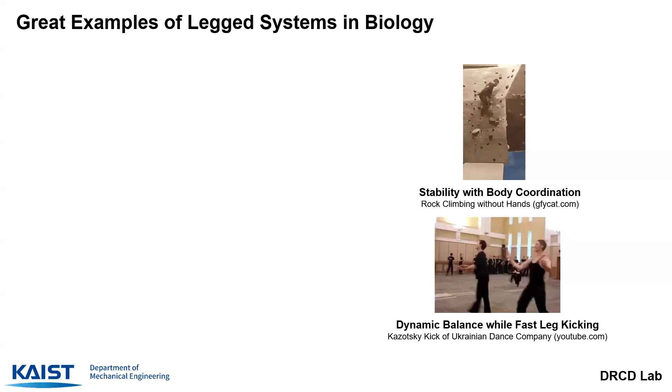A great example of a legged robot system is actually a biological animal. As you can see in this video, humans have extreme balance capability to climb walls, rock climbing, without utilizing their hands. This dynamic balance can also be achieved through fast leg kicking, as performed by a Ukrainian dance performer. This agile and dynamic capability provides great balance and agile performance in biological animal systems, including humans and some quadrupedal animals.

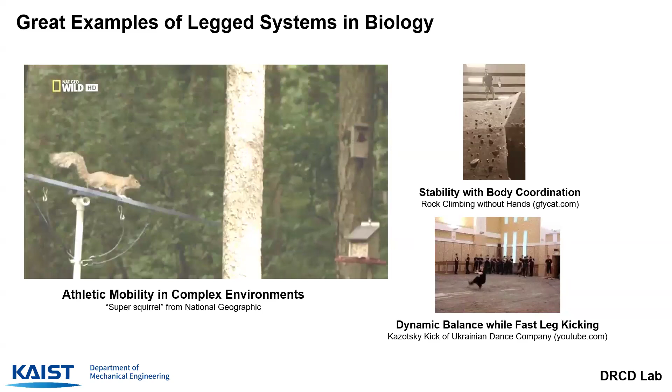But this video shows another level of athletic mobility - this is a squirrel. We assume this animal doesn't have very intelligent capability, but it can quickly jump over gaps and obstacles while utilizing its full body capability and physical limitations.

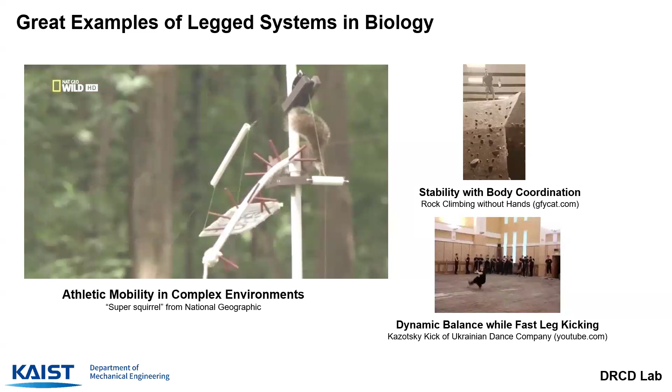It can climb a rope and utilize ladders, as you can see here. It can even ride on elevator mechanisms to navigate through very complex environments. Here we can see very intelligent behavior - it can combine many locomotion skills to navigate very complex terrain.

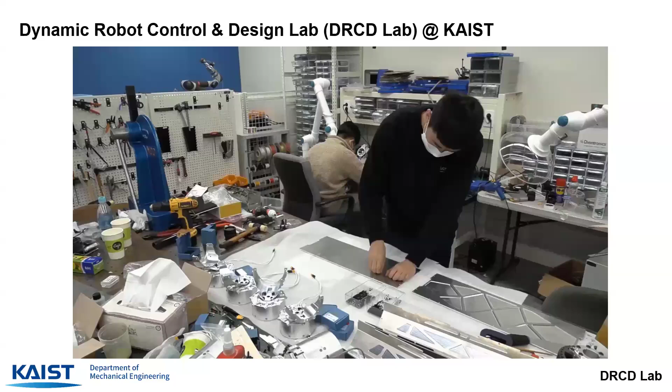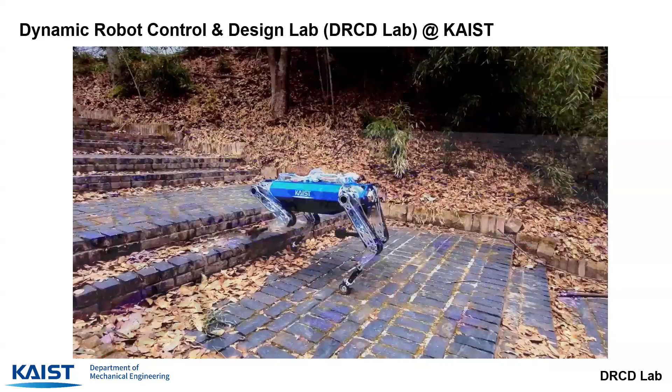In our lab, we are trying to reproduce this kind of capability in a legged robot system. Of course, we do hardware design and implementation - we manufacture our own hardware. And then we implement our control design in our robot. This video shows our robot Hound navigating and climbing up a hilly mountain near the KAIST campus.

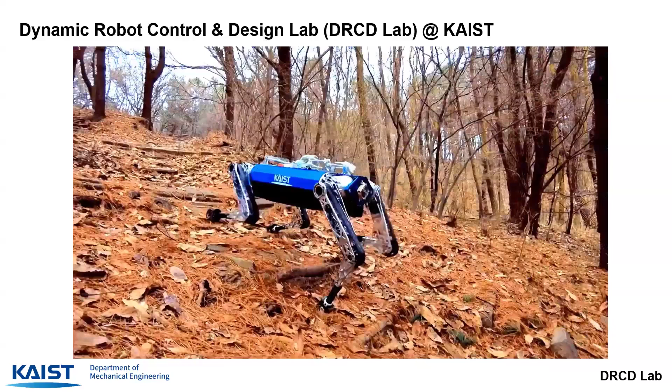In this talk, I will show two robots. The first is the KAIST Hound, designed for fast running. To achieve this, we designed our own custom motors and installed them in our robot. The second robot I'll show is the MARVEL robot, designed to climb vertical surfaces very quickly. This robot is equipped with a novel magnetic foot which can provide adhesion force.

To implement that, we utilize the electropermanent magnet. Unlike an electric magnet, this device does not need electric energy to keep the magnetic force on - we only need magnetic energy, and electric energy only when switching between on and off states. So you can save energy by utilizing this electropermanent magnet, and this switching can be done very fast.

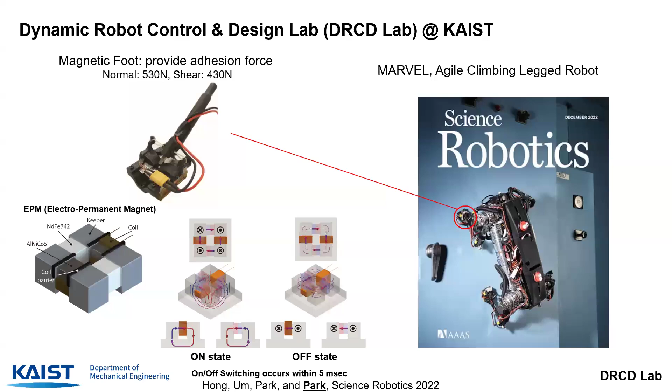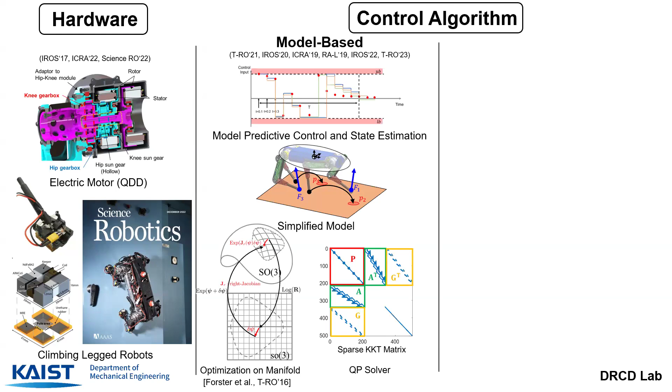For this novel hardware, we designed our own control algorithm, utilizing two frameworks. The first is a model-based control algorithm - specifically, we use model predictive control, and we study the model itself as well as the optimization algorithm. The second approach is a learning-based algorithm - we employ reinforcement learning, and we are now studying a hybrid type algorithm which combines trajectory optimization and reinforcement learning, which is an ongoing study.

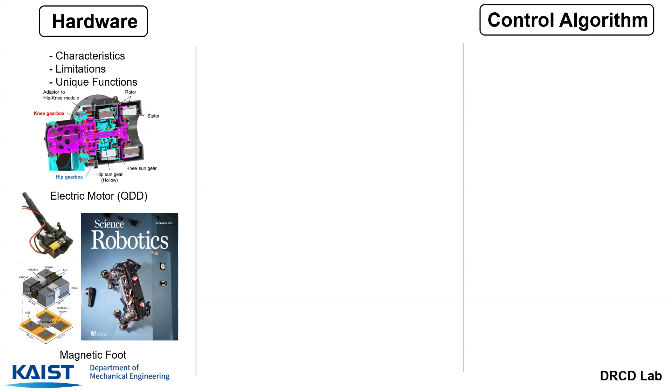So to design the control algorithm, we have to come up with a control algorithm which can respect hardware characteristics as well as limitations. Some hardware, like magnetic feet, has unique functions which did not exist in previous hardware. So we need to come up with a simulation algorithm in order to reflect this new hardware and its characteristics and limitations.

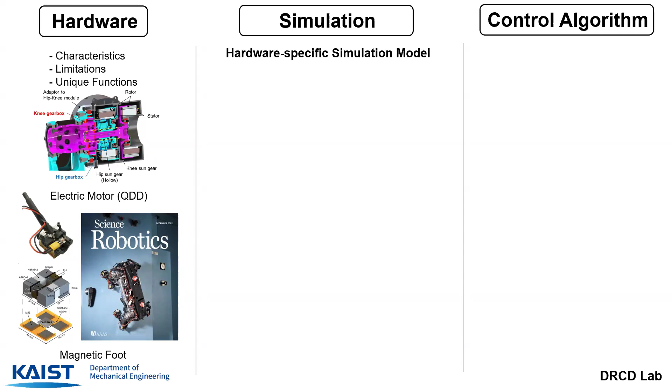In this way, we can actually fully utilize the hardware capability of existing systems. So sometimes we have a hardware-specific simulation model, and we add this kind of simulation model to existing software for dynamic simulation.

For example, actuator dynamics can be implemented. An actuator is not just a pure torque source, it has its own dynamics. So the electric motor has its own dynamics, and we add that in the simulation model.

As well as a novel hardware model - we mathematically model novel hardware and then add it in the simulator, to come up with this particular climbing simulation model.

The design control algorithm requires model-aware control design. So in the design of the control algorithm, we have to consider or respect this hardware-specific simulation model. For example, the reward function has to be carefully designed so that it can reflect hardware specifics as well as a constraint in your reinforcement learning algorithm or model-based control.

Model-based control design. So today I will talk about how to implement this, or how to come up with and design the hardware-specific simulation model and model-aware control design.

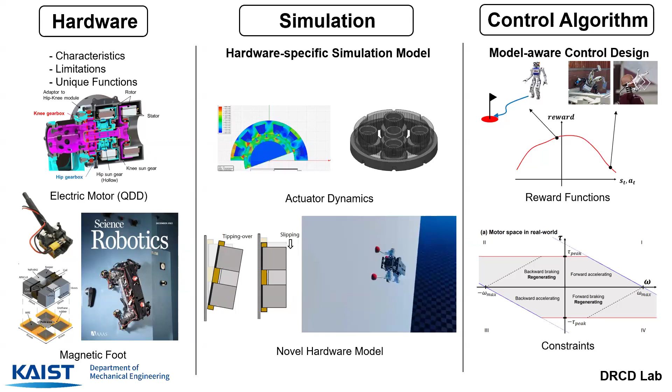As an experimental roboticist, we encounter a lot of moments of catastrophic failure, and we can learn something from this experience.

For example, this is my Mabel robot from my PhD. We broke Mabel's foot, Mabel's ankle. But don't worry, it takes only about 30 minutes to fix this leg.

And then for the MIT Cheetah 2 robot, for my postdoc, there was some amplifier explosion, and then some weird behavior that was not designed by me.

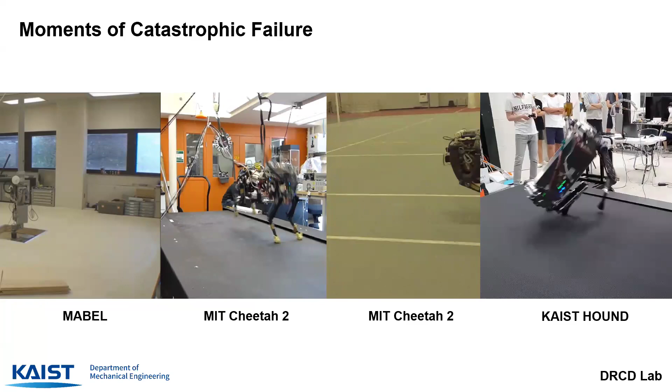And then this KAIST robot fell because of bad control. So these failures provide us some lessons, but especially these two failures actually motivated us to design new control algorithms. We will get back to these two failures later, okay?

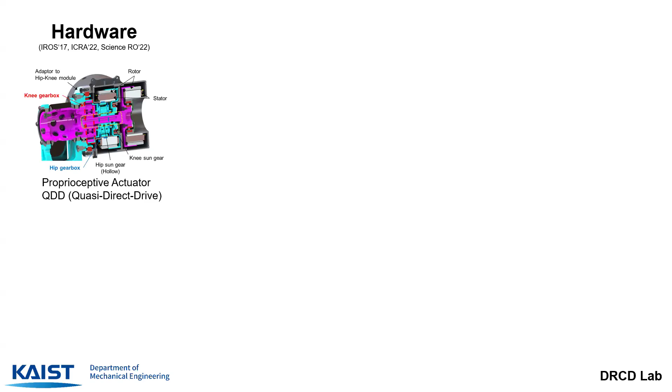So first of all, let's talk about the hardware design. We are utilizing quasi-direct drive, or so-called proprioceptive actuator, which was originally proposed by Professor Sangbae's group at MIT. And we kind of agree that this QDD actuator was actually an enabler, a technological enabler, for the success of quadruped robots as well as some humanoid robots.

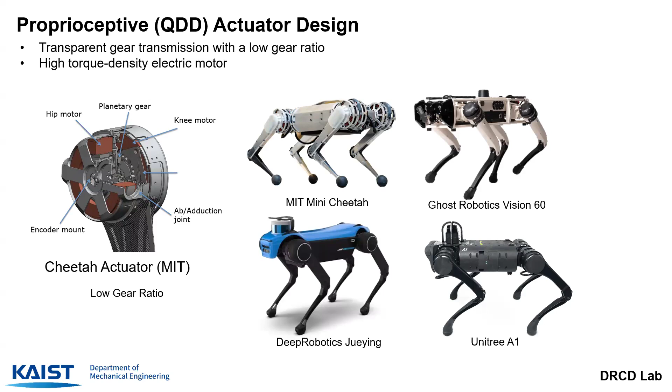The idea is actually very simple. We utilize a high torque motor as well as a low gear ratio gear reduction mechanism in order to improve the transmission, the torque transference, and improve the backdrivability.

So here I'm showing you the proprioceptive actuator design with the low gear reduction ratio. But how much gear reduction ratio do we have to utilize? In order to answer this question, we utilize a trajectory optimization algorithm.

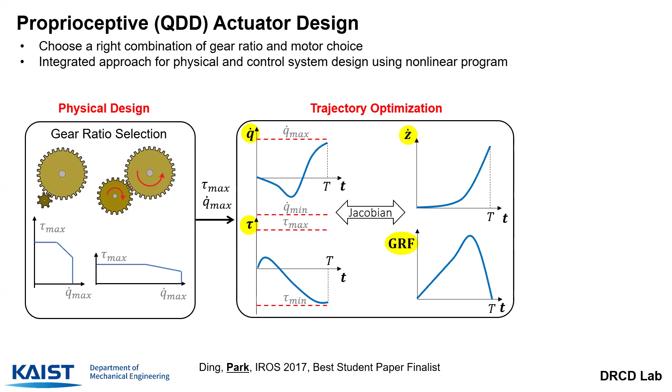In the previous method, the design procedure is actually very iterative and sequential. So here we select a gear ratio, and the selected gear ratio determines the operating region of the motor with respect to torque and omega, angular velocity. With this motor operating region, you solve a constrained trajectory optimization algorithm and obtain the trajectory. Then we check that this obtained trajectory satisfies your desired performance, and if it doesn't, we go back and iteratively select a new gear ratio and do this again.

So in our work, we combine all of this process into one nonlinear optimization problem. Here we try to maximize jumping height while reducing the impact force upon landing, while respecting limitations on actuator torque and speed.

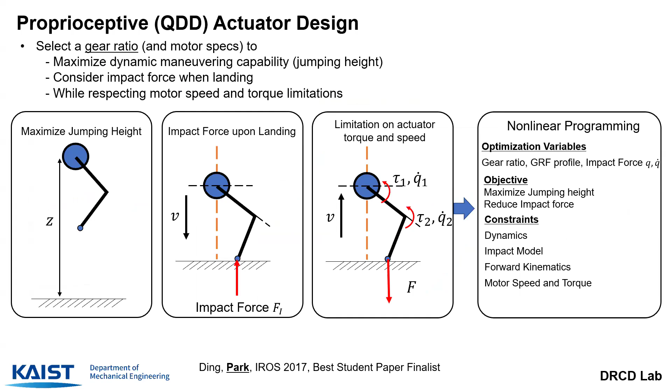And then to realize this gear ratio, we have to design a compound planetary gear mechanism. This is the performance of the jumping height of the leg installed with the actuator we designed, and this leg is actually implemented in the MARVEL design.

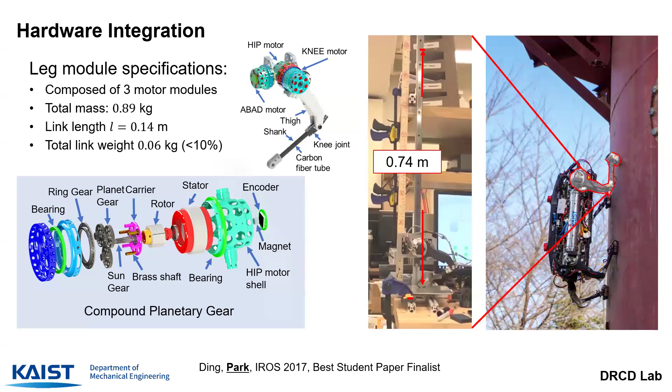Next design optimization we did is actually, now we try to include the number of gear teeth in our optimization problem. The number of gear teeth is an integer variable, so now the problem becomes a nonlinear mixed integer nonlinear programming problem. You have the number of gear teeth of the ring gear, sun gear, and planet gear. This combination will provide the gear ratio, and then this gear ratio will affect many things like motor selection, swing rate, trajectory, energy cost, something like that.

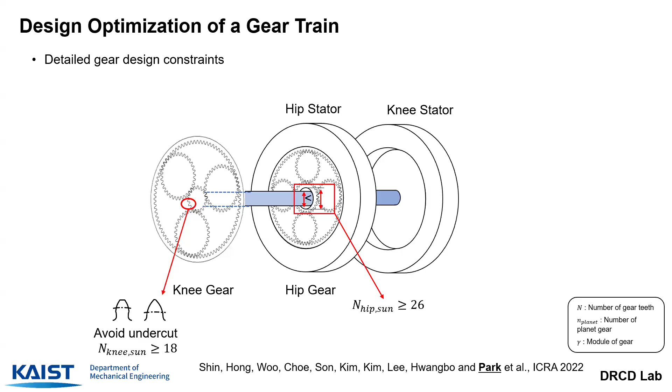The benefit of having this number of gear teeth in your optimization algorithm is that you can consider the hardware-specific design or detailed design. For example, number of gear teeth of the knee gear should be larger than or equal to some value to avoid the undercut. And number of gear teeth of the hip sun gear should be larger than or equal to this number in order to make the shaft go through the hole which is in the hip gear, for example. This kind of specific design consideration can be included in the optimization problem if you consider number of gear teeth.

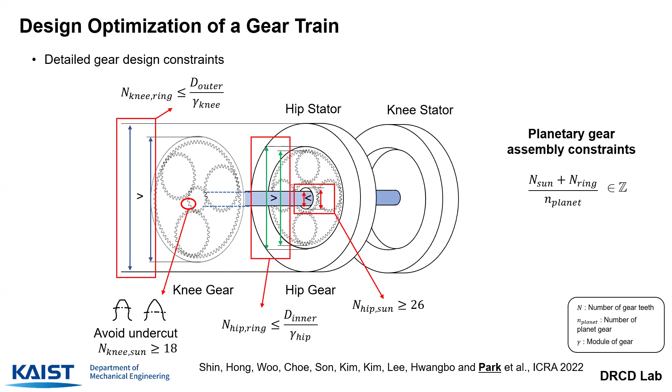And then finally, planetary gear assembly constraint, so that you can assemble the gears with that number of gear teeth to make the planetary gear set. If you solve this optimization algorithm, you can obtain the gear ratio as well as the number of gear teeth, and this number of gear teeth can be directly used to design the planetary gear set. So we designed our planetary gear set and motor module, and installed that in the KAIST Hound robot. So this is how we design the quasi-direct drive actuator to select the gear ratio, utilizing a planetary gear set.

Since I don't have much time, I will just directly go to the control design.

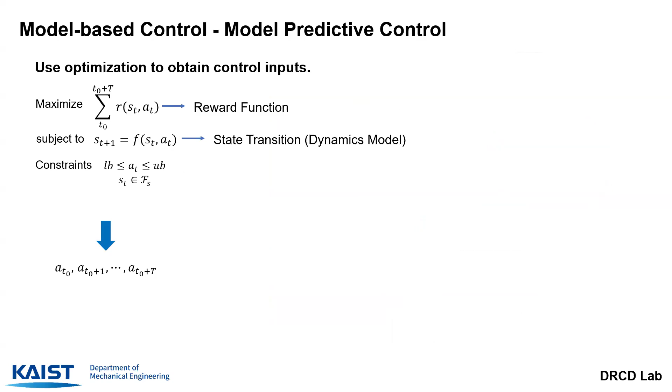The first control method is a model-based control design, specifically model predictive control. In model predictive control, we try to solve a small optimization problem that has a reward function and a state transition model. If you solve this finite time optimization problem, you can obtain the set of sequences of actions, and then you implement only the first input, first action, at t equals 0. After that, at the next sample time, you solve this optimization problem again, obtain the sequence of actions, and only apply the first control action, and so on. Then you can obtain feedback.

This optimization problem should be solved within around 10 milliseconds in order to make it real time.

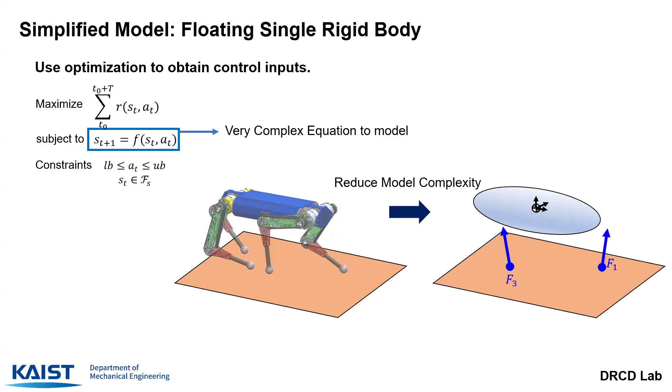But the problem is the transition model is actually very complex, because the robot consists of multiple rigid bodies - it's a high degree of freedom model. So what we do is reduce model complexity. We took out the contact dynamics model, and assume that the robot is just one rigid body, which is controlled by ground reaction force. With that, we can roll over the contact dynamics.

Because we don't have contact dynamics, the contact sequence should be predefined - it cannot come from the optimization algorithm, because the optimization algorithm doesn't have contact dynamics. So we normally predefine the sequence of foot contacts, for example trotting gait, bounding gait, and galloping gait. And then we design the MPC algorithm.

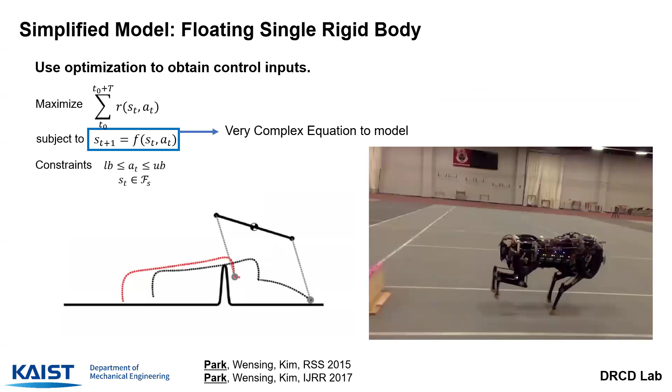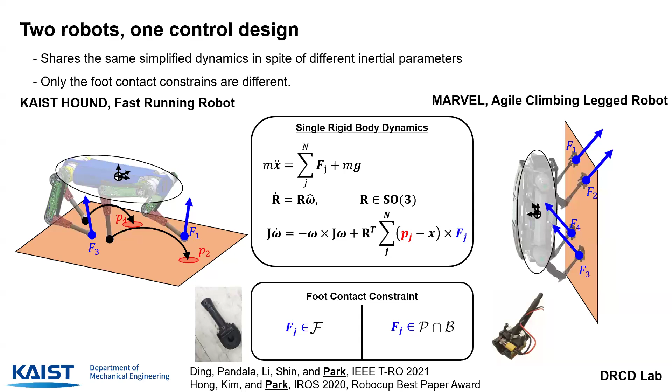If you look at the robot as single rigid body dynamics, then KAIST Hound and the MARVEL robot actually have the exact same mathematical model, but different inertial parameters and different foot contact constraints. The Hound robot has to satisfy Coulomb friction constraint, while the MARVEL robot has to satisfy foot contact constraint imposed by magnetic foot. So it's a little bit different, but they share the same dynamics and can use the same optimization algorithm.

In single rigid body dynamics, if you are working on 3D single rigid body dynamics, you have this manifold variable R, which lives on the SO3 manifold. A normal MPC algorithm converts that into Euler angles, but Euler angles have some mathematical issues - they do not provide a consistent distance between two orientations, and they suffer from the gimbal lock problem, which means they suffer from singularity.

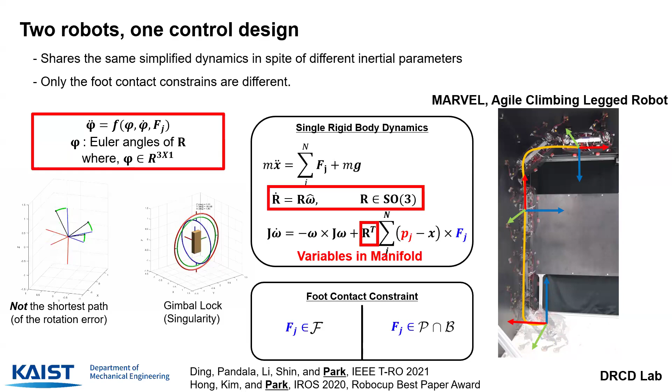To get over this problem - in a normal robot it won't be an issue, because it walks on flat ground and doesn't go into a vertical surface. But for the MARVEL robot, it has to climb the vertical wall, so it goes through a vertical posture, which is actually a singularity for Euler angles. This experiment actually failed because of that problem. There are many types of Euler angles, and some have singularity when the angle becomes 90 degrees. I picked the wrong Euler angle choice, which resulted in this failure.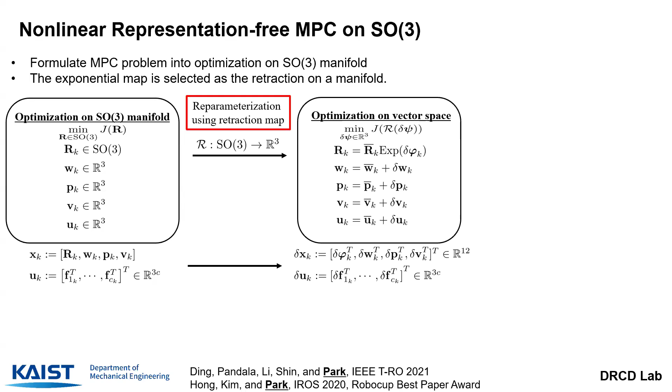So now we formulate a model MPC problem on SO3 manifold. Then the optimization problem becomes optimization on SO3 manifold. We utilize a reparameterization trick in order to make this optimization problem into a vector space problem. And to solve this problem efficiently, we need Jacobian, analytical gradient, and Hessian.

So we specifically use the Gauss-Newton Hessian algorithm. We adopted the method presented in this paper, published in TRO in 2021. Now, after this, it becomes a quadratic programming problem, and then we utilize our own custom QP solver.

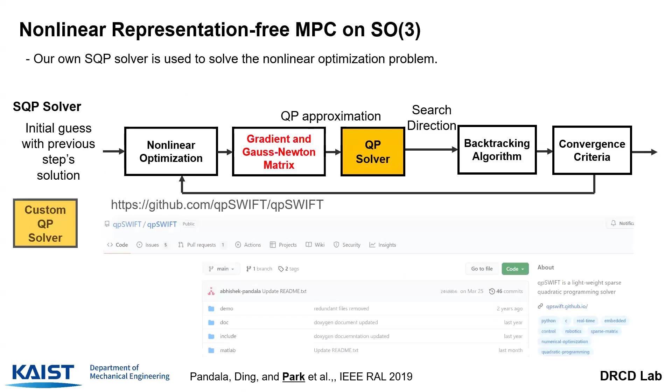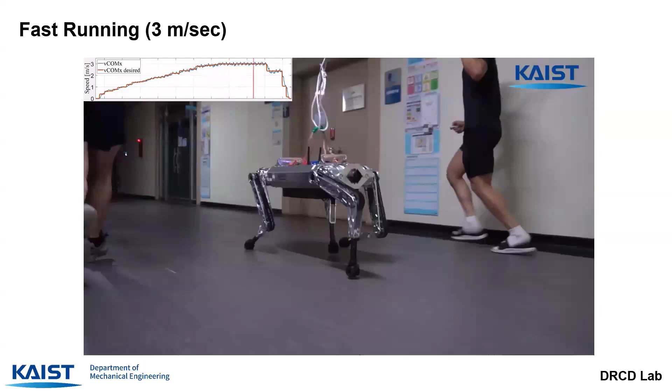And this is the result of running fast with 3 meters per second. And the robot can handle very wild kicking.

Now we can transfer this control algorithm to a climbing robot as well. The only thing we changed is actually the foot contact constraint. So we derived the new contact constraint for the magnetic foot so that it doesn't slide or peel off. The new contact constraint is actually the intersection of these two constraints.

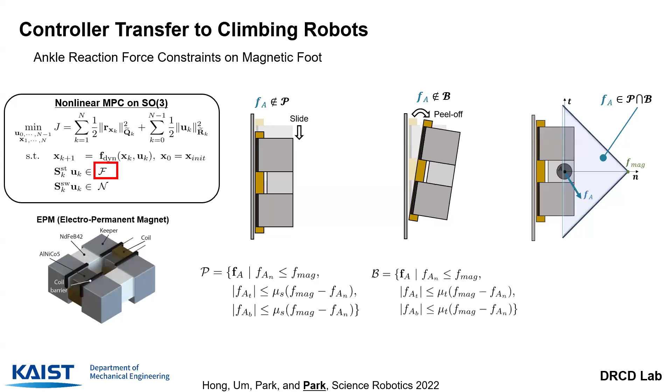When we implemented our algorithm on the robot, we can obtain the pace gait with a speed of 0.7 meters per second, as well as inverted trotting gait with a speed of 0.5 meters per second. The magnetic foot, and then the robot, is powerful enough to handle 2 kilogram payload for vertical climbing and 3 kilogram payload for inverted trotting walking.

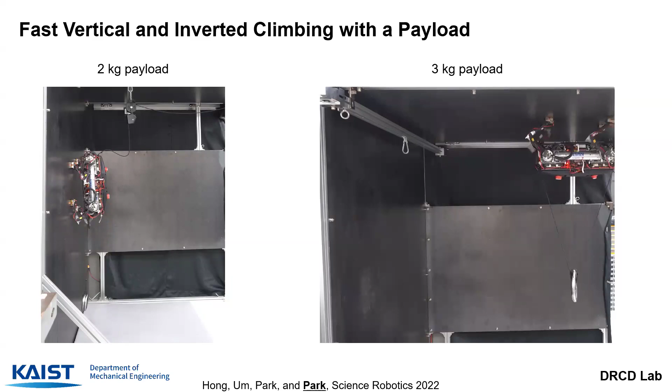And then if you utilize some trajectory optimization algorithm, then you can come up with this trajectory which can traverse the gap, and then make the transition from vertical wall to inverted wall.

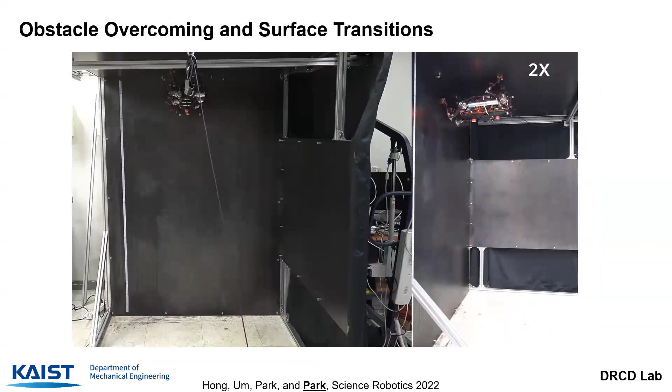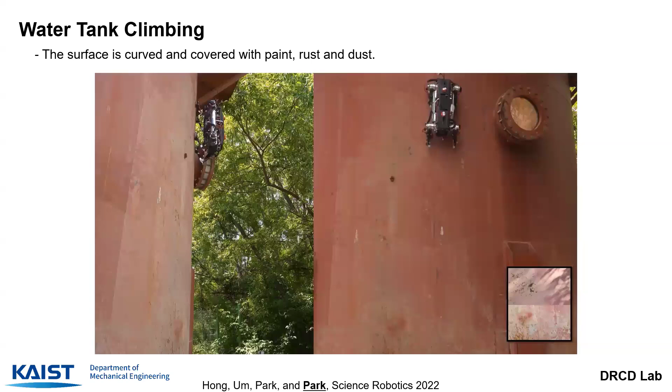And the robot was also tested on the outdoor experiment. This is actually a water tank made of steel, but it's covered with very thick paint. So the paint depth, thickness, is actually 0.3 millimeters. But the magnetic force is strong enough to provide the attraction force still.

And this method can be also applied to state estimation, because the state estimation is basically another optimizer problem, right? So we proposed the invariant smoother for state estimation for our robot, and then it provided the best result compared to state of the art algorithms.

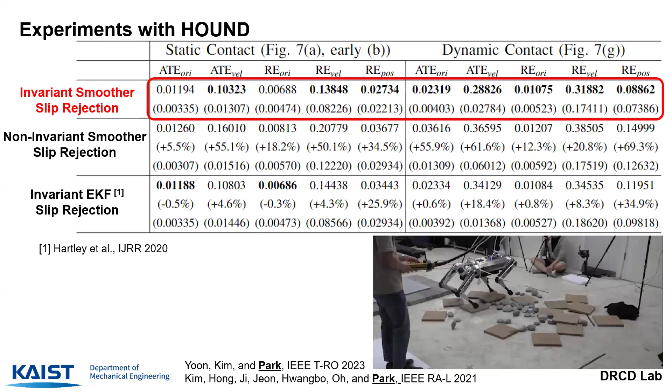So now we want to include the contact model in our model MPC problem. So here now we add contact impulse to our transition model. And then this contact impulse is obtained by solving this optimization problem.

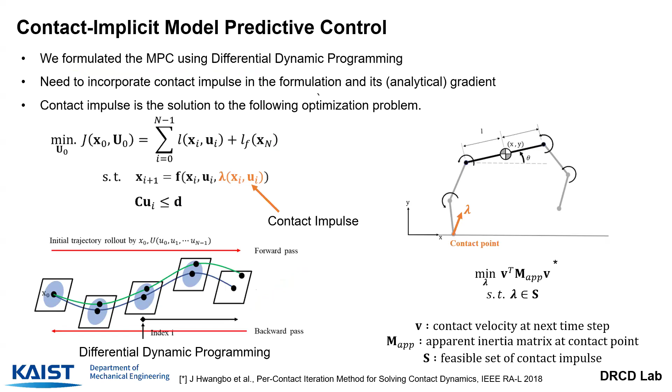This optimization problem has a quadratic cost, but it has some constraint, and we call this the complementarity constraint. Because of this special structure of the complementarity constraint, the solution of the problem will be categorized into 3 cases.

The first case is the separating case: after the impact, the robot's foot leaves the ground. This is easy. Then the clamping case: after the impact, the robot's foot is stuck with the ground and doesn't move. In this case, after the impact, velocity becomes 0.

And the third case is the sliding case: the robot slides after the impact. So for each case, we can obtain the analytical solution of the impact contact impulse. And because we have an analytical expression, we can obtain the analytical gradient with respect to some physical quantity.

So for the clamping case, we can see that after the impulse, the velocity becomes 0, the foot velocity becomes 0. So any gradient of contact velocity with respect to some variable will become 0, right? And this results in local minima, actually.

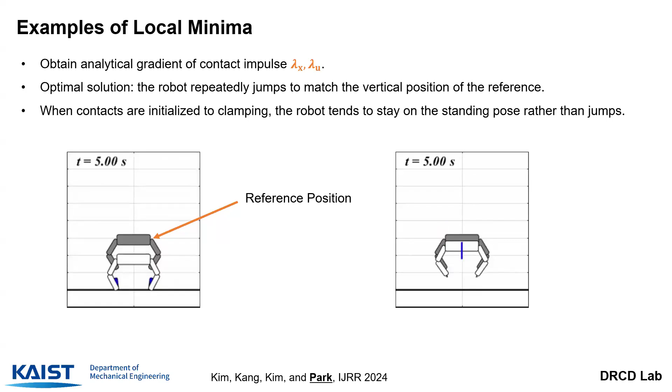The desired solution is something like this: periodic jumps to match the reference position. If you see the gradient, you can see there is a local minima on the left half side of the space.

To solve this problem, the solution space of the complementarity constraint looks like this. It can be either a vertical line or a horizontal line. We actually approximate that space with a more smooth and continuous space.

Something like this. We introduce this more continuous and smooth space by introducing the variable rho, which is a positive value. If rho is very large, it does not approximate well with the original constraint. But if rho is very small, it approximates very well the original constraint. So we have an adjusting knob for how well we approximate the original constraint.

With the original analytical gradient, the robot tends not to jump. There is a previous method with some heuristics, but this does not provide periodic jumping behavior. If we use our method, it provides very periodic jumping, and it can reduce the cost a lot.

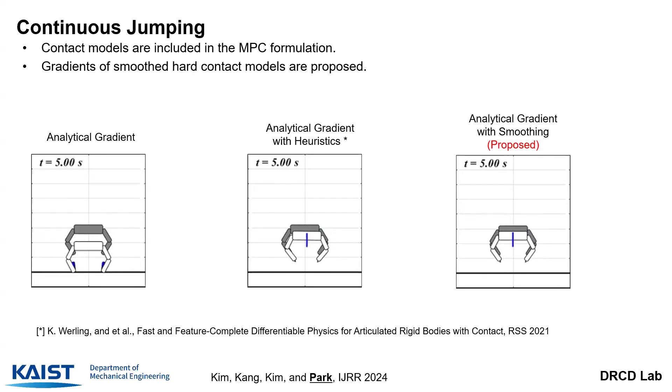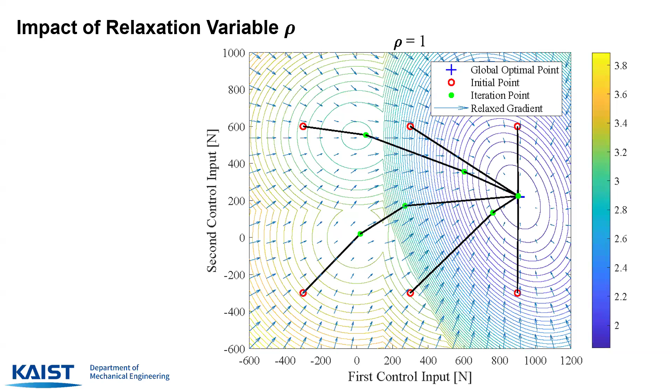If you look at this gradient, when rho equals 0, this is actually the same as the original constraint—there is still a local minima on the left. As we increase the rho value, it converges to the global minima, even though it starts close to the local minima point. But if you increase it too much, the quality of the solution becomes worse. So there should be some sweet spot over the values of rho.

If the value is too small, it does not jump. If the value is too large, then it jumps too often, which results in a bad cost value. There's actually a pretty wide sweet spot that provides pretty good reward value, okay, cost value.

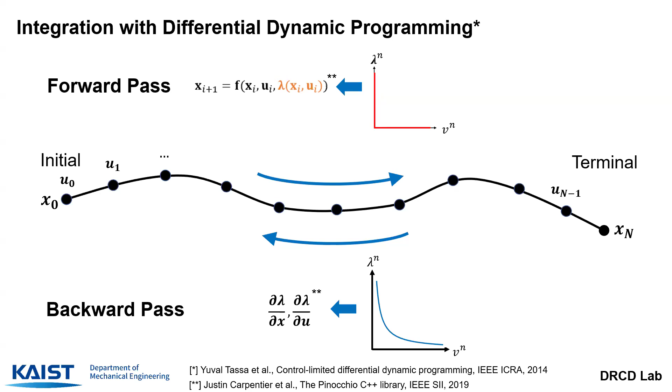Now we integrated this analytical gradient with differential dynamic programming. In the forward pass, we have an exact impulse model. In the backward pass, where we need a gradient, we use the approximated smoothed analytical gradient. We also employ the multiple shooting variant of DDP to improve the convergence property.

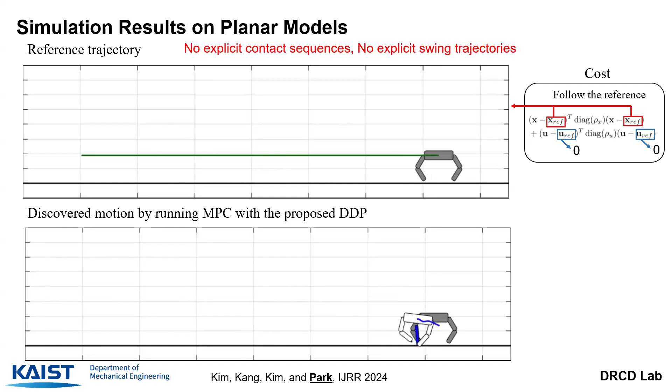If you implement this algorithm on a planar model, in the simulation model, on top you have a reference trajectory. There is no swing trajectory and no foot contact sequence, but the algorithm automatically comes up with a new contact sequence.

Here we have a slippery surface. The robot sometimes utilizes the slippery surface, sometimes it propels itself so that it can catch up with the reference if required. And then there's this cartwheel motion.

The algorithm can come up with this nice cartwheel motion.

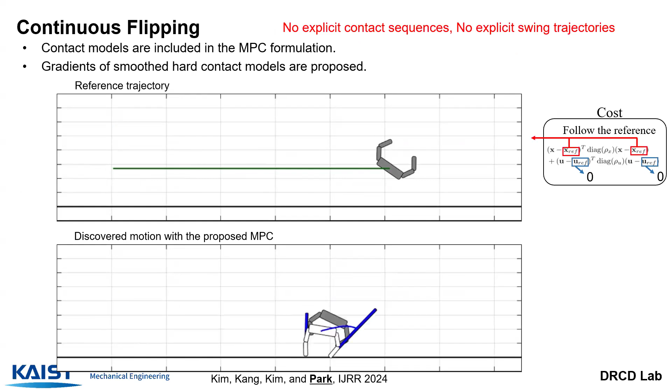If we extend this idea into the 3D model, we add some additional reward that can prefer a floating gait and symmetry gait. That's the only added reward function. And then you come up with this nice motion.

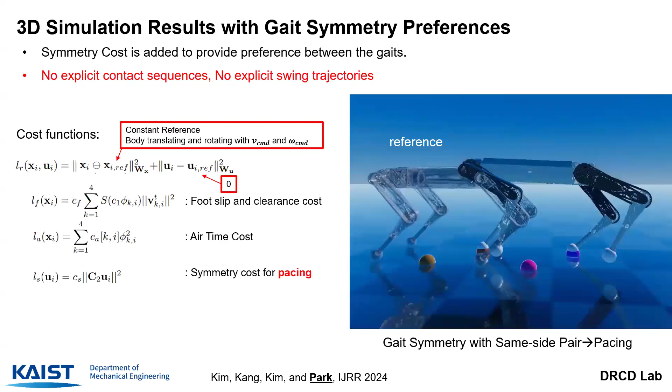For this unstable posture—this is actually a very unstable posture—the robot comes up with nice motions to catch up with this unstable posture. There is no equilibrium in this unstable posture. The only way to follow this reference is by making contact.

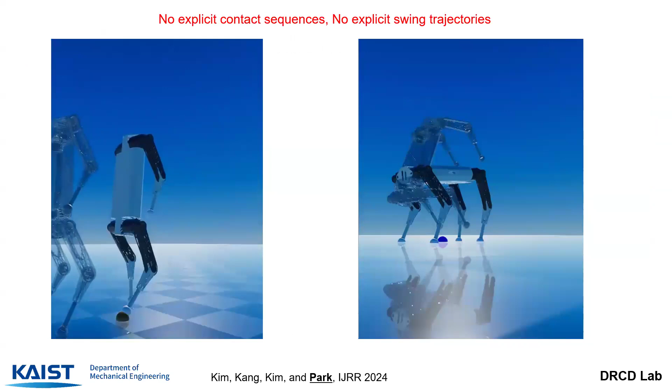You can obtain the humanoid robot motion just by changing the reference. Now the robot only utilizes its hind foot.

We implemented this algorithm on a real robot. Of course we did a tremendous amount of engineering to make this algorithm work on a real robot, which cannot be contained in the journal publication, sadly. But anyway...

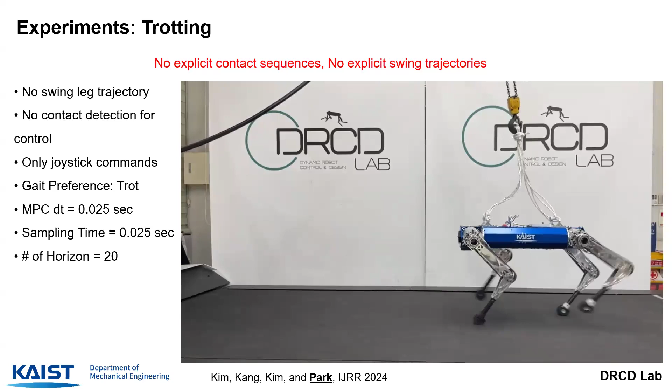The computation time satisfies the real-time constraint. This unstable pose can be followed—there is no equilibrium, no dynamic equilibrium. That's why the robot cannot keep this posture, but it tries as much as possible to follow the reference trajectory, reference posture.

The second approach we are currently utilizing is reinforcement learning, and we recently published a paper in the Robotics and Automation Magazine. My student really wanted to work on reinforcement learning, and this is his first controller.

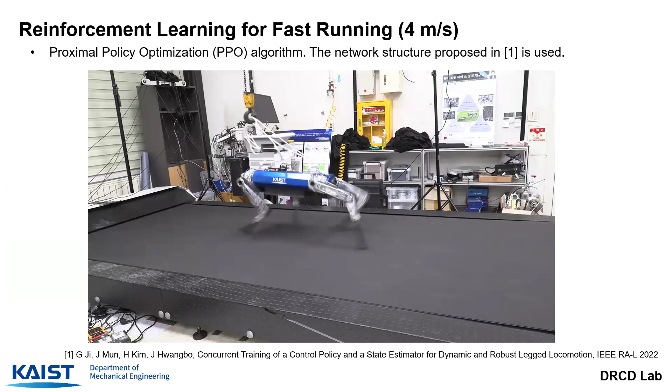This controller can achieve 4 meters per second fast running. 4 meters per second is already better than model-based control, right? Model-based control's maximum speed was 3 meters per second.

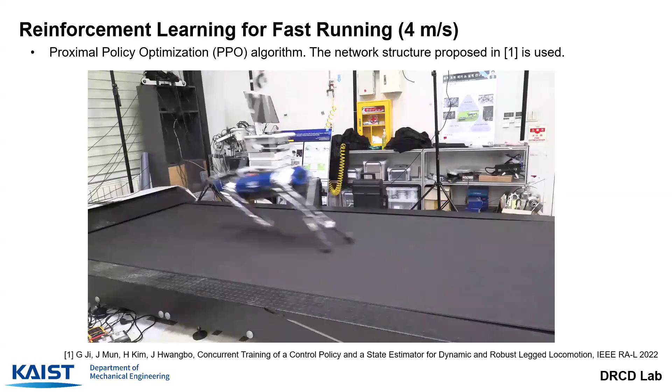It was also able to handle corner cases, even though it stepped onto the non-moving part of the treadmill. It can recover from these corner cases.

But if you look at the gait, it looks strange to me—it looks unnatural to me, right? I mean, animals utilize this kind of gait, you can see.

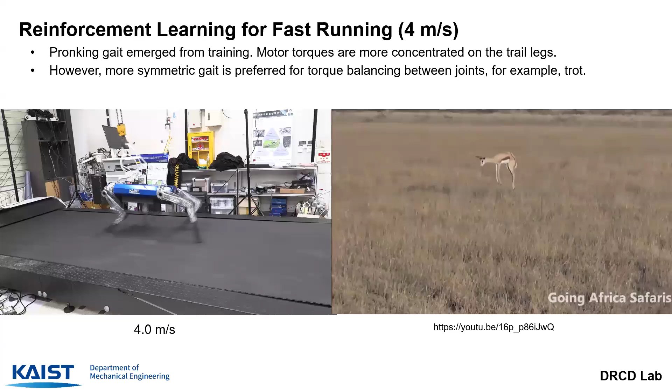I'm not sure why they are utilizing this gait. It doesn't look energy efficient or natural to me. But they say they exhibit this gait when the animal is happy, right? So, we don't have a happiness function in our design.

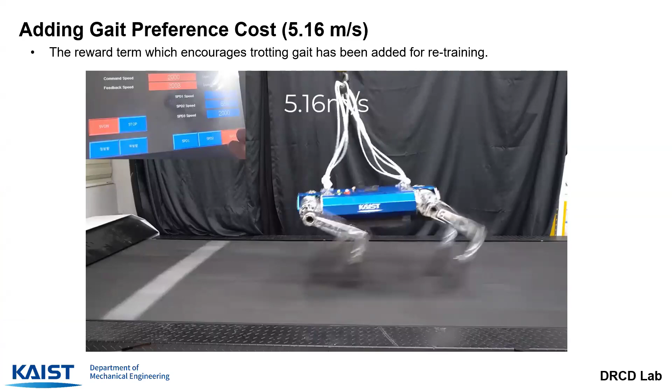So to evenly distribute the torque to the symmetric foot, we add the trotting gait preference to the reward function, and then we can come up with a more natural gait which provides faster speed. So the speed was increased to 5.16 meters per second. We have a 1.16 meter per second speed increase.

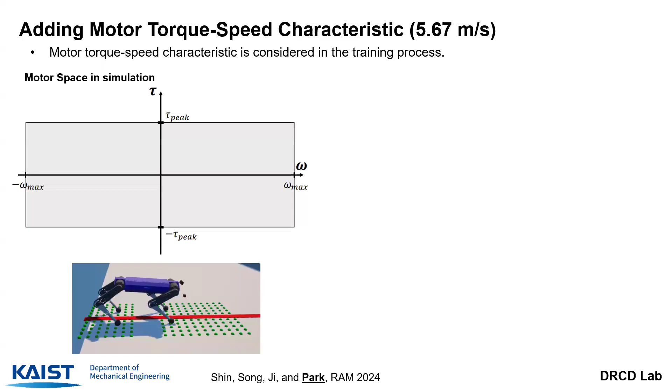To further increase the speed, we employ the motor operating constraint. In the URDF file, you can specify angular velocity constraint and motor torque constraint. They are separate, so they provide a box constraint. But the real operating region of motor space is not actually a box constraint, it just looks like that, because of back EMF and resistance. If you have inductance in your model, it becomes ellipsoid. But we only consider resistance in our model, and we obtained this motor operating region.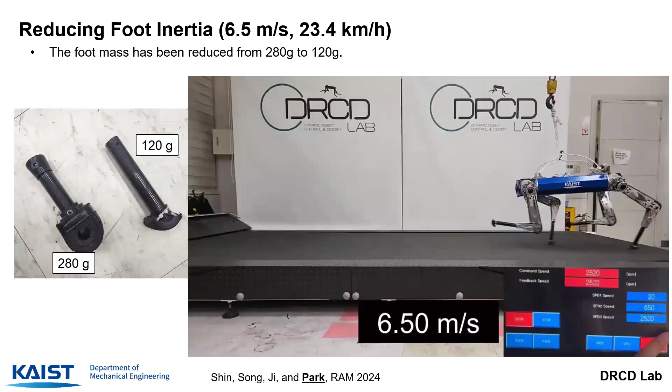And then as a mechanical engineer, we have a choice of changing our mechanical hardware. So we changed the foot so that it becomes less heavy, and we obtained 6.5 meters per second running. This was 2 years back. We broke this record, and then some other institution broke our record as well recently. The robot finishes a 100 meter dash within 19.87 seconds, and this made our robot achieve a Guinness World Record.

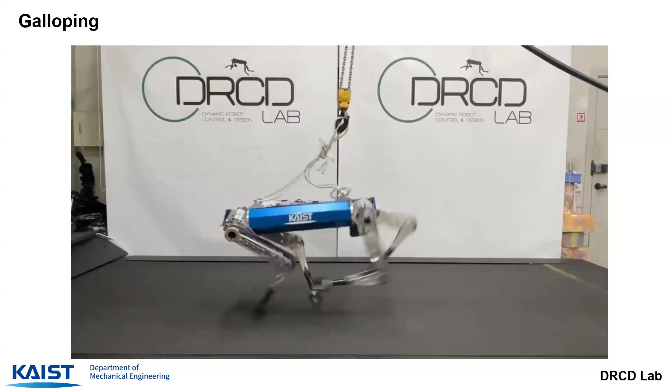The reinforcement learning algorithm can come up with galloping. If you have a dog or cat in your home, you know they don't utilize trotting gait for fast motion, right? So we can actually implement the galloping motion, but sadly it does not provide faster performance. We don't know why.

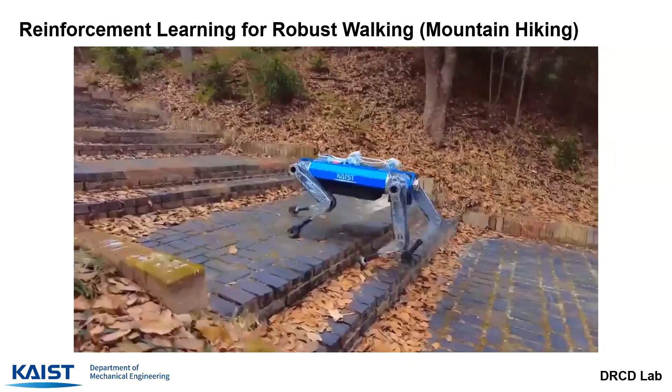And then as I showed you already, we utilize a reinforcement learning algorithm for this robust walking on the mountain. Okay, let's skip.

So we are trying to implement this reinforcement learning algorithm for a climbing robot as well. If you have a non-magnetic surface, and you use an MPC algorithm, it actually fails, as you can see, because it cannot attach to the non-magnetic surface. But in the gecko case, you can see that even though it fails to attach its foot, it can recover from it, if you use RL. Even though it failed to attach to the surface, it can actually recover from it.

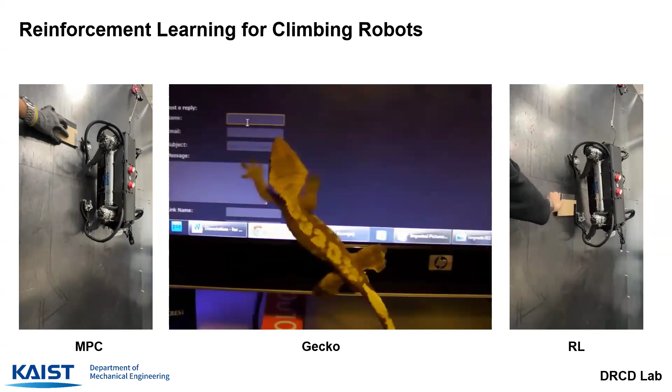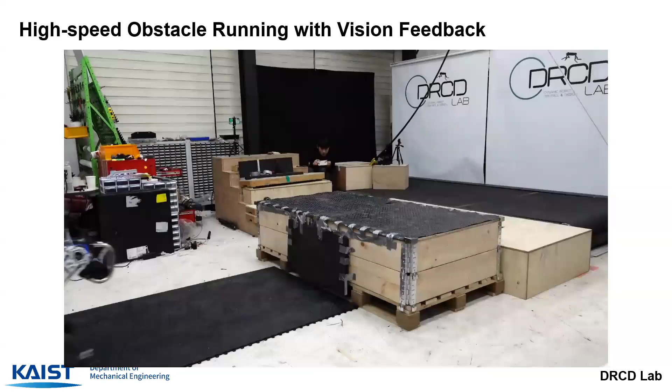And then if you integrate this RL algorithm with vision feedback, we can obtain this very dynamic and agile performance. This is about 4.0 meters per second running.

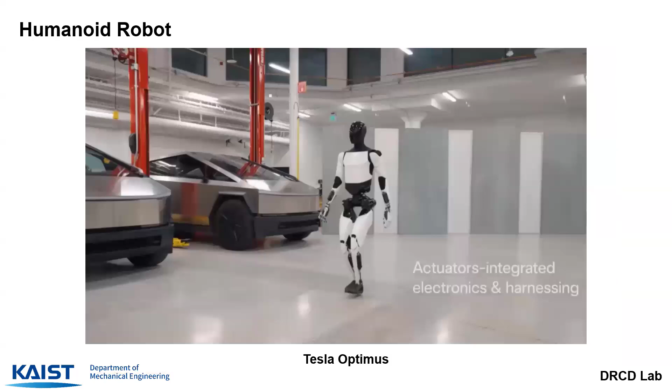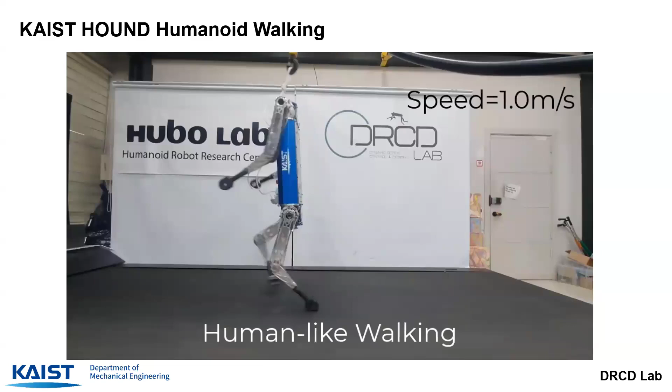And then recently many humanoid robots have been shown by many companies and in industry. We don't have a humanoid robot yet, but we can show that just utilizing the actuator technology and reinforcement learning algorithm that we have now, we can probably come up with a humanoid robot control algorithm. So even though we don't have a humanoid robot, we can make the quadruped robot work like a humanoid, without changing any hardware design. So we didn't change any hardware design, but it can actually run up to 3.5 meters per second now.

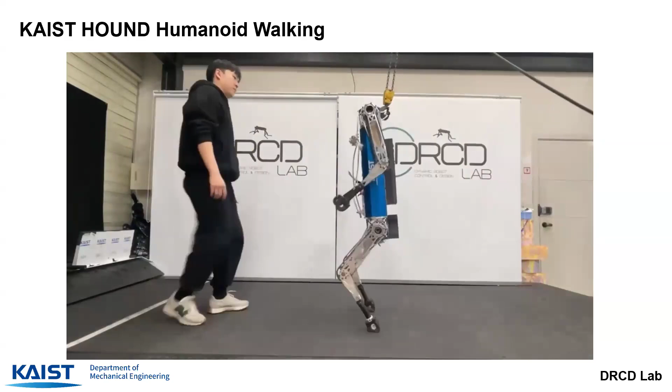And then it can recover from kicking from the experimenter. The nice thing about this control design is that it does not have enough degrees of freedom for side kicking, because we don't have an actuator for that. But it can actually recover from this kicking as well.

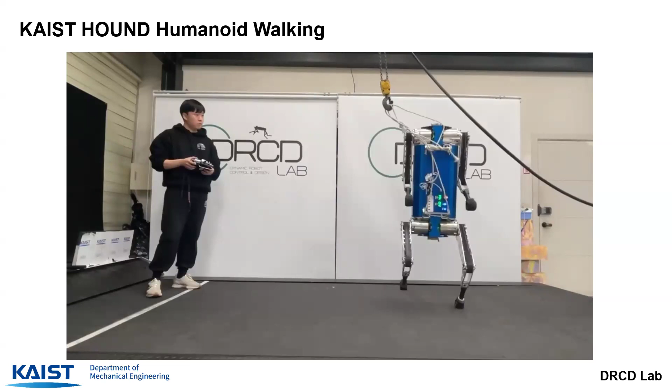And then we can also make the robot lift some payload, which is about 7.5 kilograms.

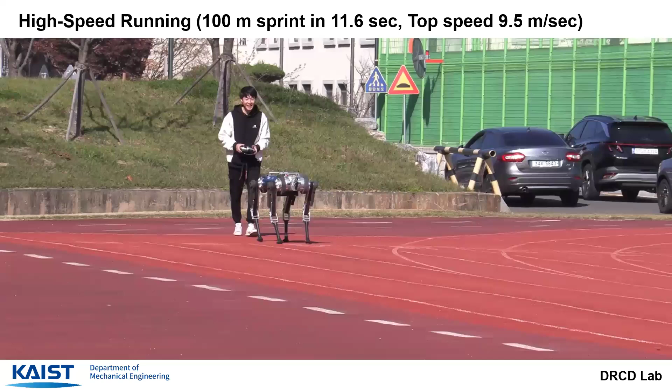And now we are actually trying to improve the record of the quadrupedal robot running. The fastest speed we could obtain is 9.5 meters per second, and the robot can finish the 100 meter sprint in 11.6 seconds, which is probably faster than most of you audiences here, including me, right?

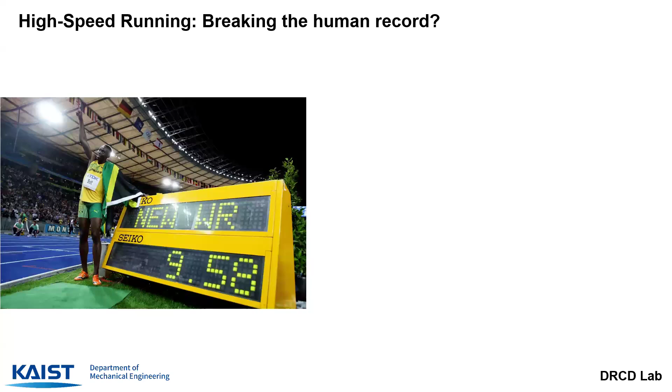We are also trying to break the record of the human, Usain Bolt. But, as you know, we have a lot of failure moments, and we're hoping that we can learn something from this as well, the failure moments as well.